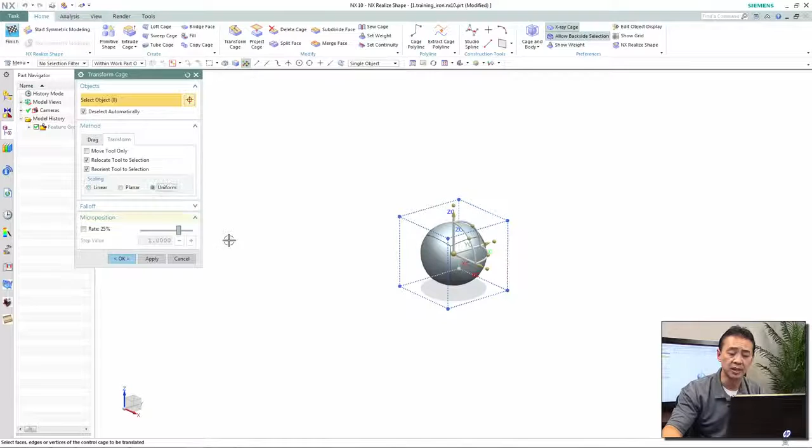What we want to do today is go over one of the functionalities in NX Realize Shape. We'll start by using a simple geometry, a sphere of a certain size, and take advantage of NX Realize Shape by dragging some of the cage faces in a certain direction and moving one of the cage ends.

Once that's done, I want to go ahead and trim off some of the bottom so I can have a flat base. What I'm designing today is an iron, a consumer product, so I want to go ahead and have a flat bottom.

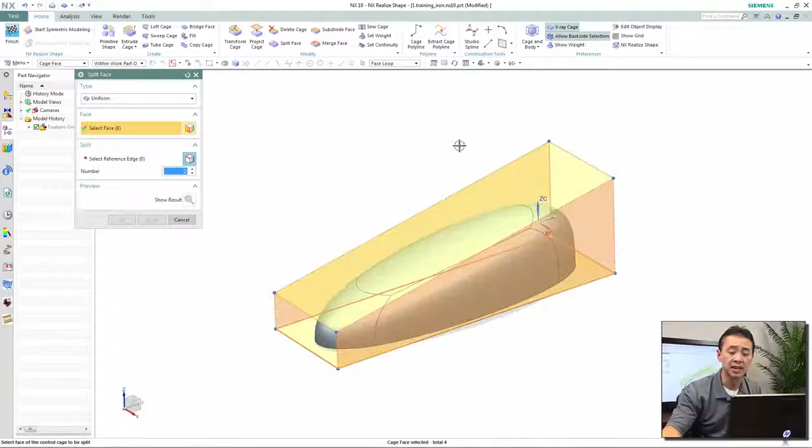Now once that's done, I want to go ahead and split up some of those faces so I can take advantage of that. Using the split face command, I need to define how many edges or separation number of reference edges I have. In this case I'll use 2, and split that on both ends.

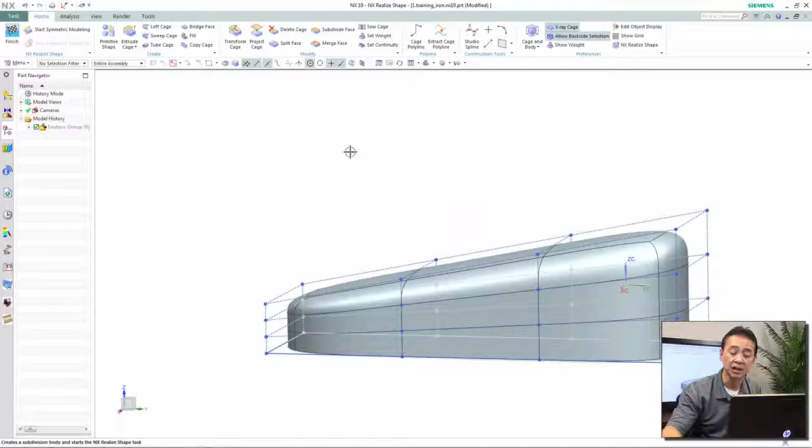Once that's done, what I want to do next is move the front end of this particular cage faces, and then also move the back end, so I can get a little bit of separation in the body of this particular iron.

Now once that's done, I want to go ahead and move the back end a little lower so the transition will look a bit cleaner.

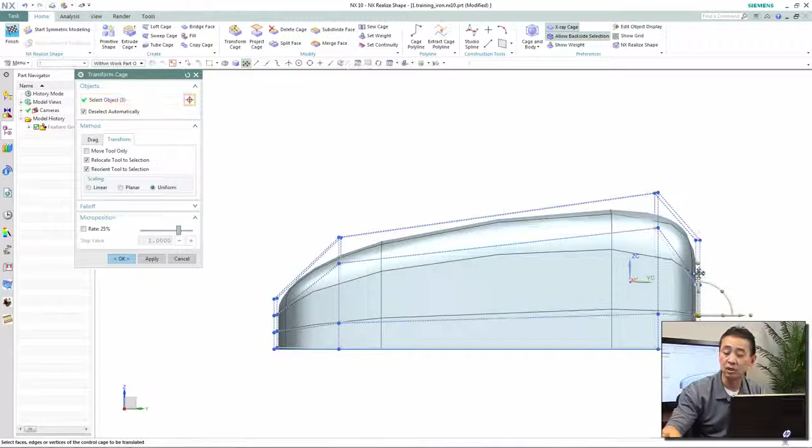Once that's done, the next thing I want to do is remove the center faces. By puncturing a hole through this, I'll be able to create a kind of grip for the handle.

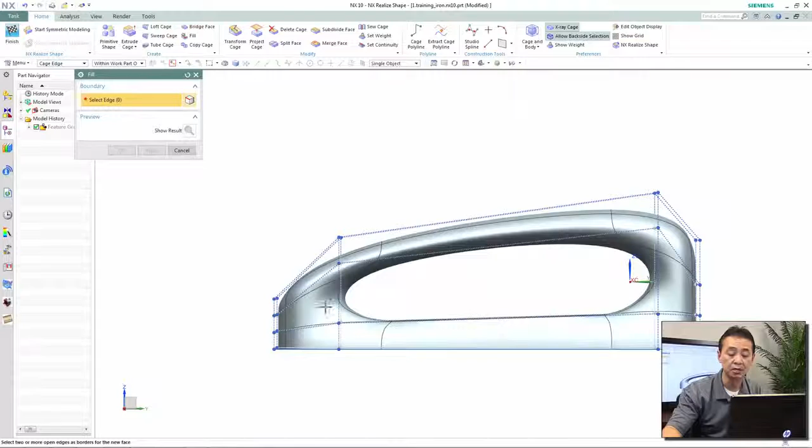Now what I want to do next is use the fill command and kind of stitch these edges back in. So once I select all 4 of those edges, each one of them fills in properly for me.

What I want to do next is take a look at the front end. In this case, any iron will have a sharp edge. I'll go ahead and close off the front end, and then also make the second set, the base, a little bit wider. By having a wider face, we'll be able to provide a better iron surface.

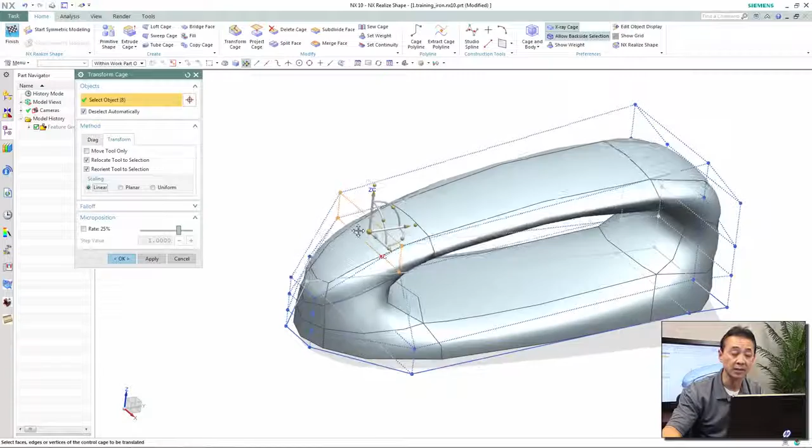Now what I want to do is modify the top end, once again using the transform cage command, to get a proper grip for the handle.

Likewise, I want to do the same thing on the back end. I want to open up the back end, and on the base I want to open it up, while on the top end I want to narrow that down a little more using transform cage.

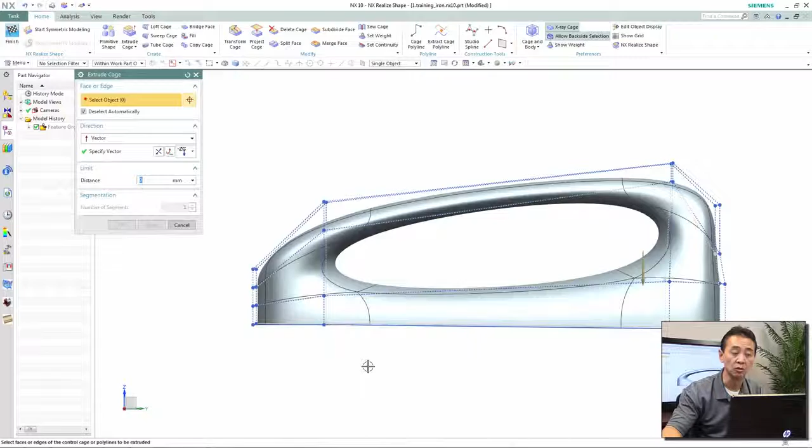Once that's done, the next thing I want to do is use the extrude command. Using extrude cage, I grab on all 3 of those faces, and then extrude that to a certain distance.

When that's done, now I want to expand that. I want the base to have a little broader area, so I'll use transform cage, and this time drag that using a uniform option.

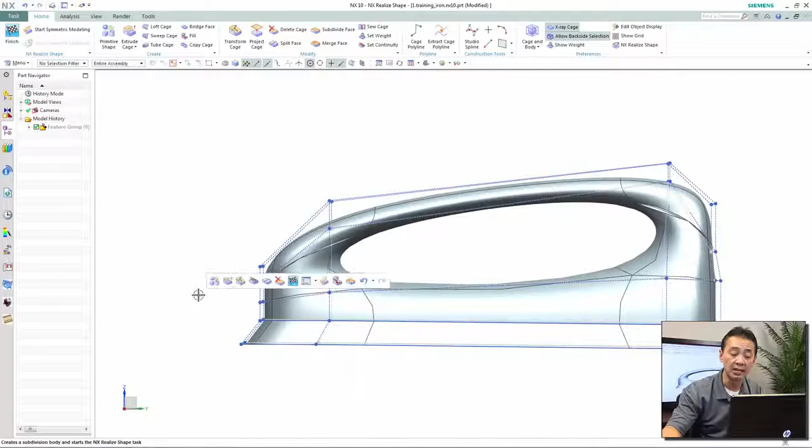When that's done, I notice the front end still isn't what I want, so I want to extrude another one. Now instead of a sharp edge, I have a nice 2-step base for this particular iron.

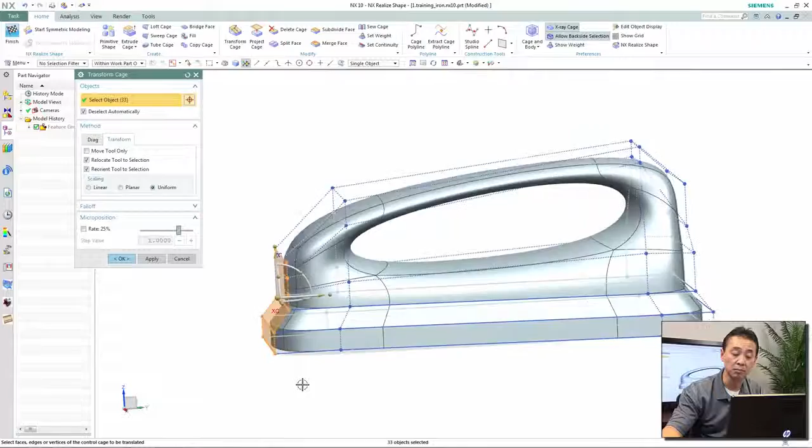Now I want to once again close off the front end to make it a little bit tighter and usable for ironing purposes. Using the transform cage again, I can close up the front end, and on the second set of cage faces I want to open that up a little bit.

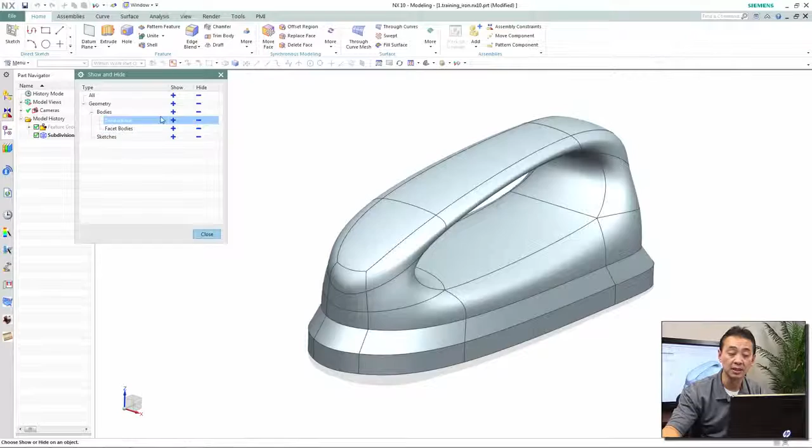So this is kind of a quick way for me to create a consumer product of the iron. When that's done, of course, I want to display an ironing board, which will make the shape look a little more realistic.